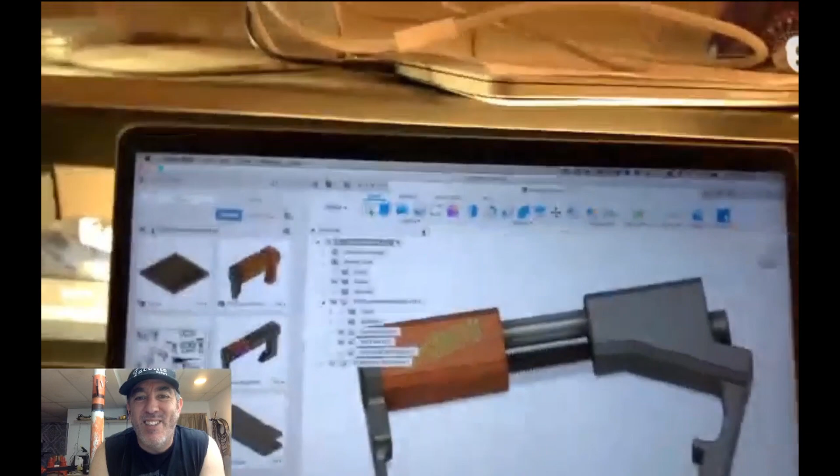So check this out. There's that quote from the other day that is hanging by my desk. That one will never come down. I know it was probably a moment in passing that nobody else thought was interesting, but when I heard it, it was the passion in Dan's voice. You asked him, how much do those cost? He's like, it doesn't matter. Just the way he said it, I was like, oh, that's so good.

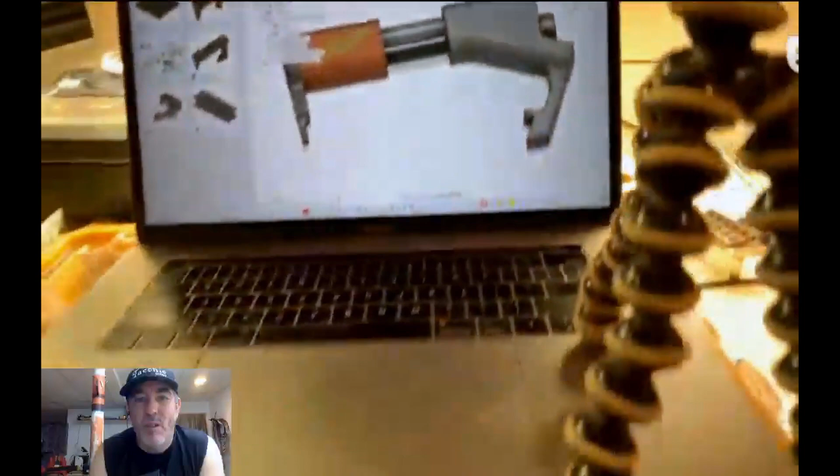It is so true. So I'm going to have to figure out a way to set this camera where I can actually use the keyboard. Do you have one of those little cheap tripod thingies? So I got this little mini Gorilla Pod. Hang on. That's cool. Oh yeah, so there we go. That's something you can see. So this is your trim setter, correct?

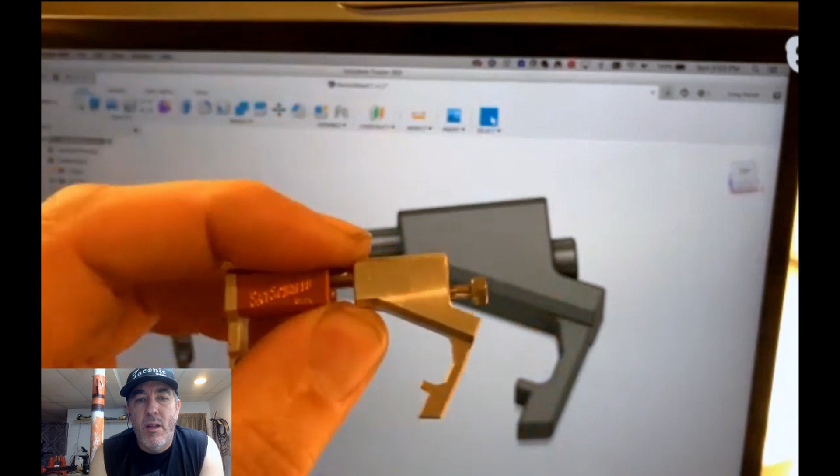Yeah. Hang on, let me grab the actual part. So there's the actual one, right? And this is manufactured by your friend in Indiana? No, this one I made this morning. This chunk is brand new. Hang on, I'm looking for the... here we go. Sorry, I'm flipping things around. This is the one that we sell now. This is just for Floyd Rose, normal original Floyd Rose intonation.

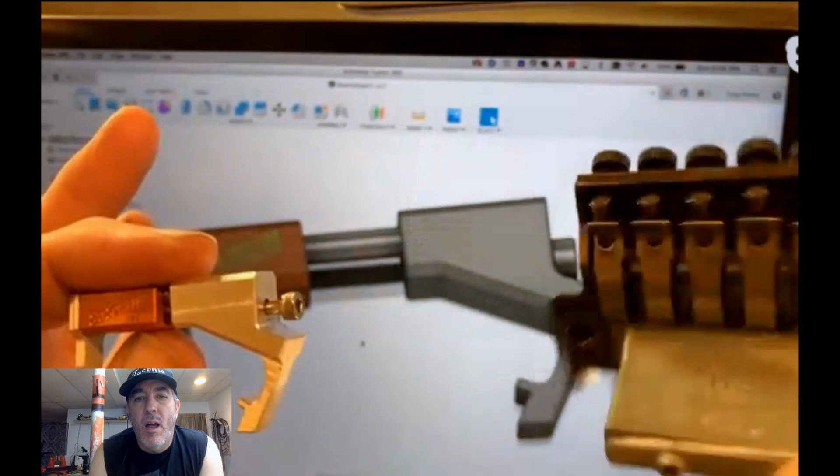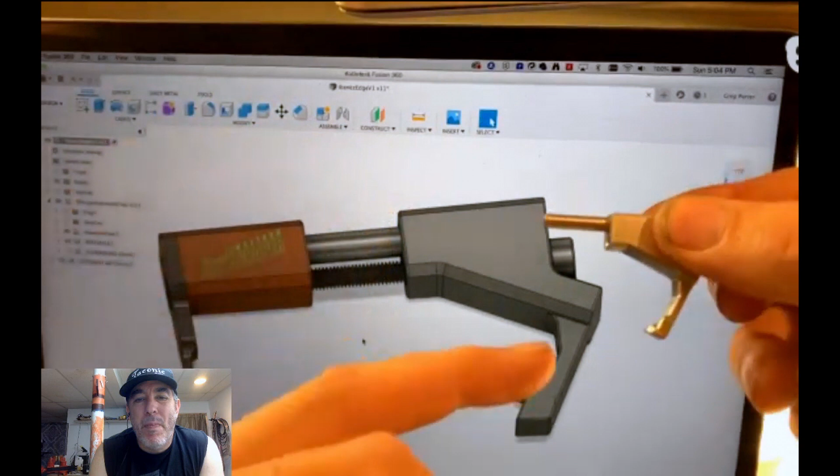And everybody has been asking me, can you do Ibanez? So I'm trying to figure out how to get a tool that works with them. I have a bunch of Ibanez tremolos sitting on my desk to make sure it works with everything. So yesterday I made prototype 1. I feel like I'm doing a puppet show. On prototype 1, the foot, the way Ibanez is, as you would tighten the tool, it would actually kick down. So this morning I redrew this foot.

I got up at 8 o'clock this morning, redrew the foot, and then recammed the whole thing. I make all the prototypes, so I recammed the whole thing and then spit this out. This was done before noon today. So in a matter of a couple hours, changing the design. From idea to prototype in an afternoon. Yeah, that's crazy.

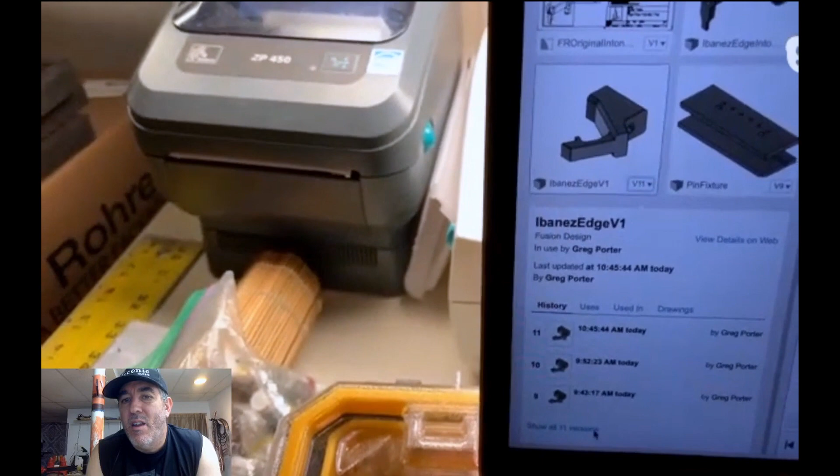Do you have the previous iteration? It would be good to showcase it. Is it still in the history in Fusion? Ooh, yeah. I don't do this very often, but can you see? Hang on. Sorry for the shaky cam. Here in the corner. To your right, just a little bit. There we go. It will take you through every version that you've done. I've done 11 versions of this tool, and at any time I can go back in and open that tool, and everything will come in with it.

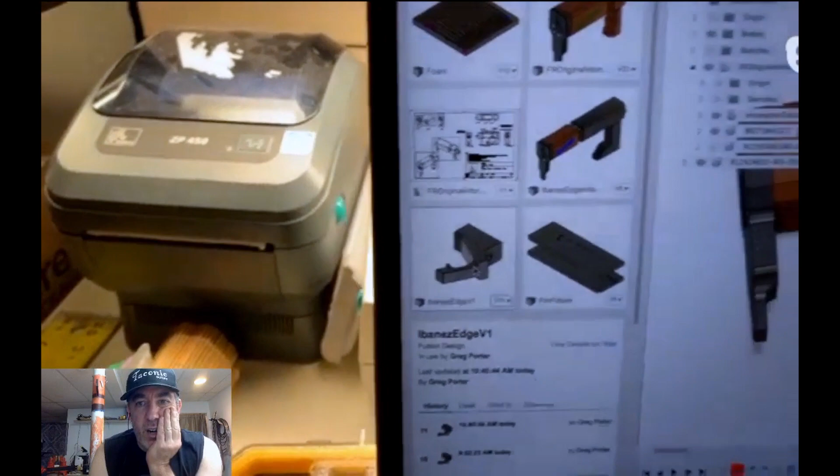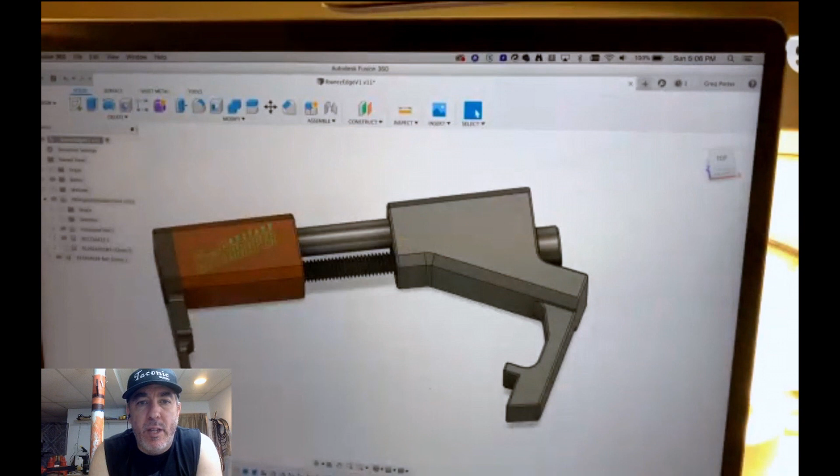Cool. So that's all server side too, not on your computer, correct? That's correct. So you don't have to have a terabyte of storage? No, it's free storage up to a certain amount. Sorry, shaky cam again. Then I think, like everybody, you have to pay. But I pay for a subscription, so I think I get bigger hard drive access, but I'm not going to swear to that. Can you rotate that just a little bit in the space there? Yeah.

Slick program, so you can really get around it. So this part is what's awesome: all of my fasteners, like this socket head cap screw, you can just go in and insert from McMaster-Carr. I don't know if you're familiar with them. Anything that McMaster-Carr sells, they have a 3D model for, and that just saves you all that time.

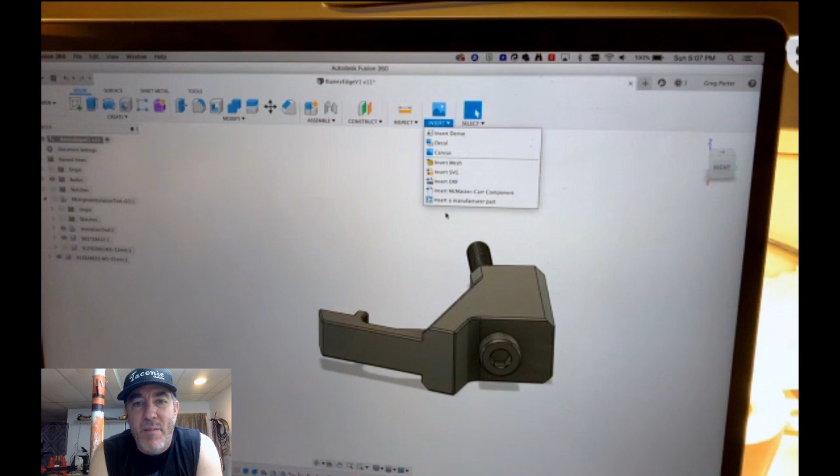Like these steel pins, I buy them by the hundreds, and I know when I go in and insert a model from McMaster-Carr, over here on this side it actually has the part number. So when I make this and say, yeah, that's the screw I want to use, there's the part number right there. I can just order 500 of them. Oh my gosh. That was a game changer for me.

So what's fun is there's actually a timeline, and you can see how this thing was built. You can literally go step by step. Give it a second to catch up. Can you actually go back to the sketch that you started with? Yeah, that's what I'm getting ready to do. So let's turn that on. So this was,

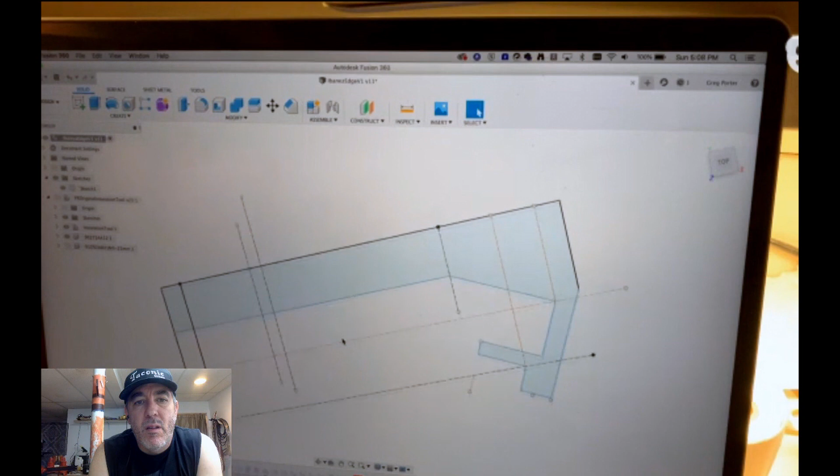I went in and measured with my calipers, which are up in my shop right now, to the thousandths, where all the clearances were, not in the tool, in the actual bridge. So just taking the calipers: where do I need to go. These are all the rough measurements of, hey, I need something that sticks down over here, I need a foot to catch something over here, and then I need this much vertical clearance.

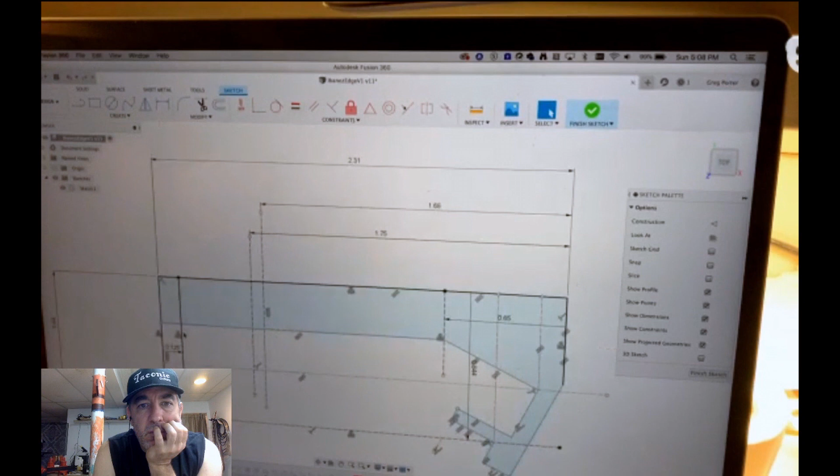If I go in and edit this sketch, you can see all the dimensions. One of these is a minimum dimension, 1.68 inches. I have to be able to pull it in that far. This is like a dummy where that hook would be that catches the saddle. Then this is where it needs to extend out to, and that's 2.31 inches. Then from this breakover point, I need 0.65 inches, and on and on. So this is all dimensioned up with how I think it should go together.

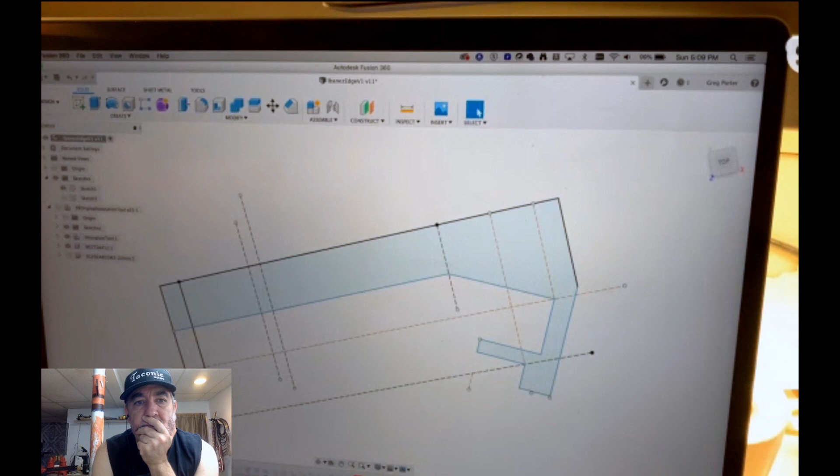Then let me hit that. I think it'll show how I brought these things in. I've got to turn things on as they go. Then I brought in that half of my tool. This is the back half, or the hook half, of the intonation tool I currently make. I wanted to use that so this can be both Floyd Rose and Ibanez with the same half, so you just swap out the hook end. So I brought in this model I already had made; we've been manufacturing those for a couple years. And it was like, okay, how do I interface that?

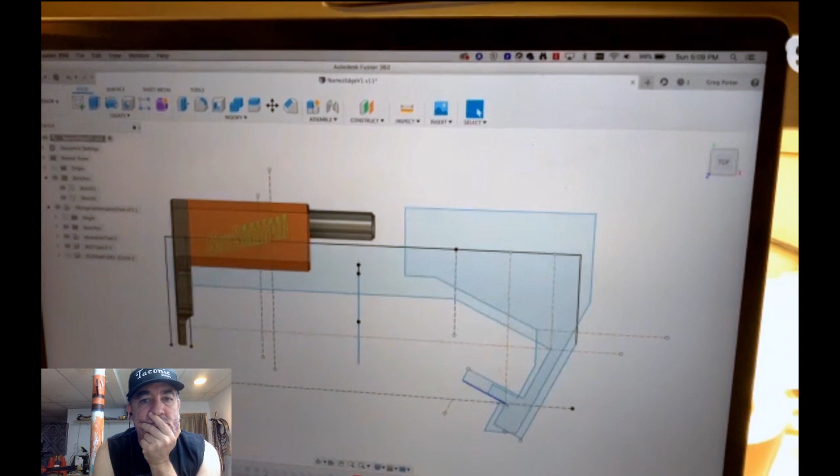I'll do it from the top here. This is stretched out to the maximum. Then here's maybe what the body of this thing is going to look like. So drawing the same lines, making things parallel and that sort of thing, but then capturing that detail from my sketches. The next step was to extrude it. I'll back up a step. I basically took this form and pulled it up, and I'll do this and just kind of undo it.

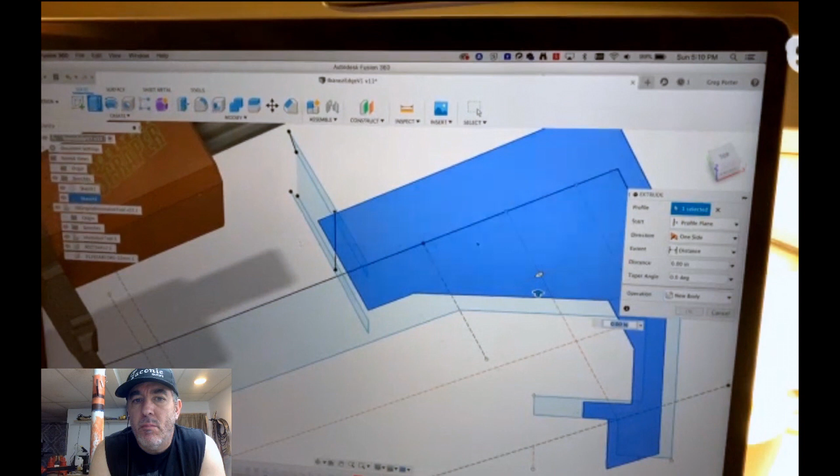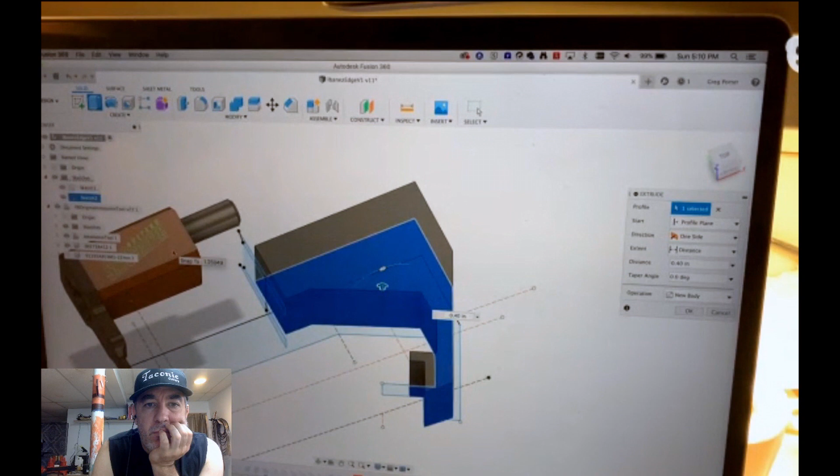So you just hit the extrude button. And your constraint is there to the left? You've got the geometry to the left telling it how far to extrude? Yeah. So let me try this again. I can stretch it and say, hey, I know this is 3/8 of an inch. Or you can start to snap to things, so that would align this. And then you can say, actually, I want it to be a 2-sided extrusion, and I'm going to grab this bottom side and make it that.

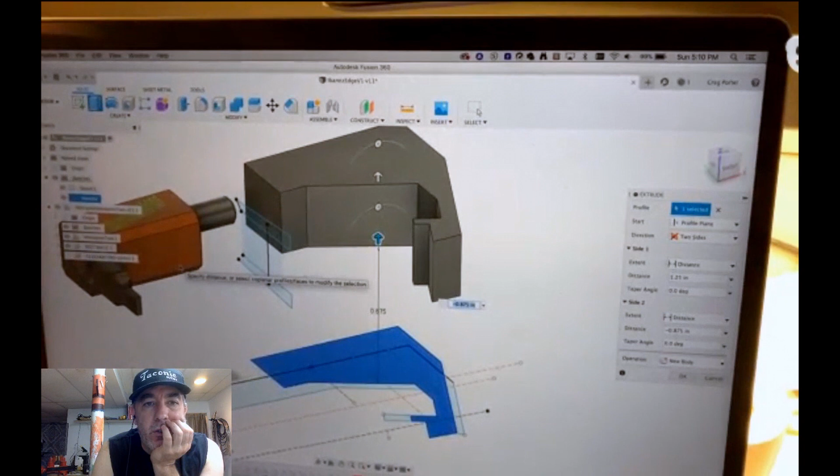So without knowing the measurements, I can make this thing exactly the same thickness as this thing. Did that make sense? Yeah, it's snapping to the geometry that you already have there, correct? Right. And I'll just kind of show a couple things. If I needed to move this face, like if that needed to match up over here, you can do what's called a press pull, and then you can say it needs to go to there. If for some reason I needed to start that way, I could do that.

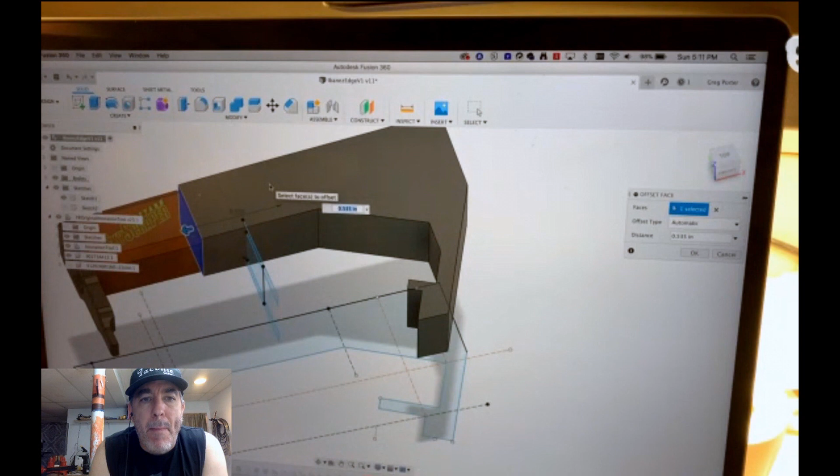But I'm going to cancel out of this and undo that so that we can take a look at this timeline. So I extrude the thing, right? And it's not exactly what I want yet, but it's close. Then kind of moving things around. Some of this might be boring. No, keep going. In this one, I created, let's see, I think it was sketch 3.

I created a sketch on this back face, okay? Because I wanted to take away a chunk here and a chunk down there. So I'll step back one, maybe. And I extruded using this sketch. I extruded into a void, and I'll show it happening. So there's that and that, right? So that makes the foot nice, how I want it. And then we can actually go backwards, and I can show you how that happened.

So you can create an extrusion. I can select this piece and this piece. And then as I pull it through, it's going to turn red because it's creating a void. So you can see how it cut that piece out. Yep. And I know this is iPhone through computer screen, whatever.

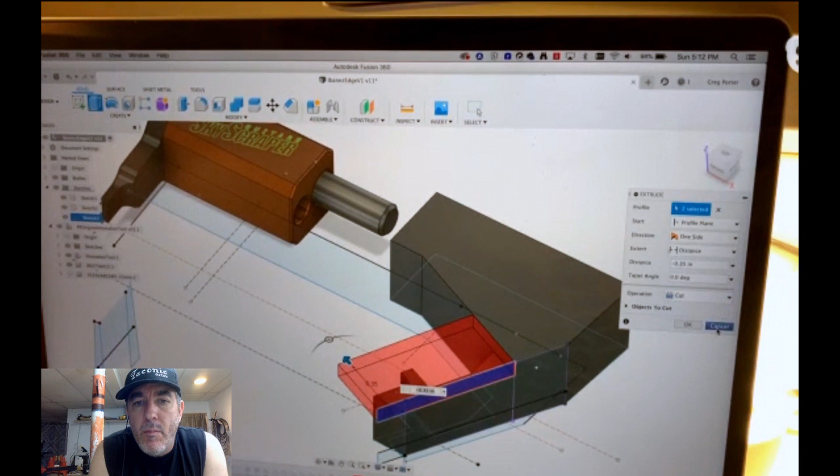You can tell it to cut. You can tell it to intersect. You can tell it to be a new body. You can tell it to join. However you want that to happen. Here we want it to be a cut, right? Because I'm taking material away. So that's the step I did to get that piece and that piece. Then the next is starting to chamfer it. So that's these edges.

So the chamfer, was that also part of a sketch, or is there a chamfer feature? There's a chamfer tool here, so I can just select any edge like this one, and you can just start to pull it, and it'll chamfer whatever dimension you want. Cool. Which is slick. And so part of this is utilitarian, right? What size does it need to be? How does it need to function? And then part of it is, how does this feel in the hand?

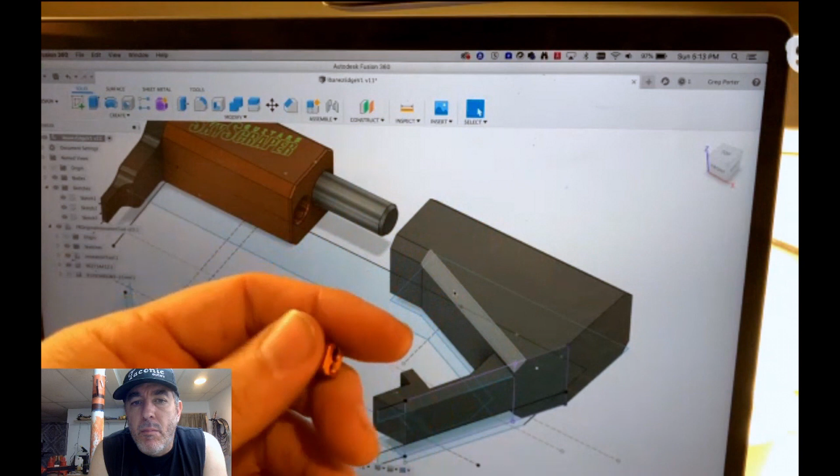And if you hold something with nice chamfered edges and you're working with tools all day, this is way nicer than something with square and sharp edges. Absolutely. So there's a little bit of that tactile that I'm always looking for when I design things. Like, yeah, that works, but how does it feel?

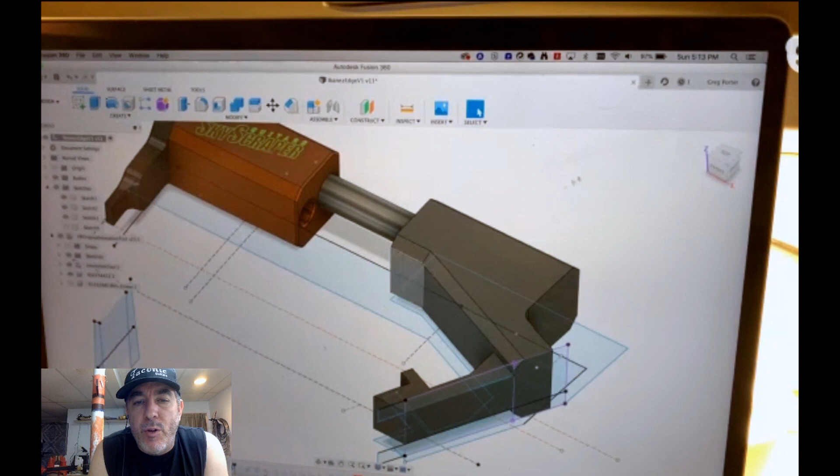Oh, like we talked before about Frank Ford's string winder. There's something about just that feel, like I was like, oh my god, I have a real job or something. Yeah, and I've got some tools in my shop I'll show you that are very much that way for me. I paid way too much for them, but they're so awesome, you have to have them.

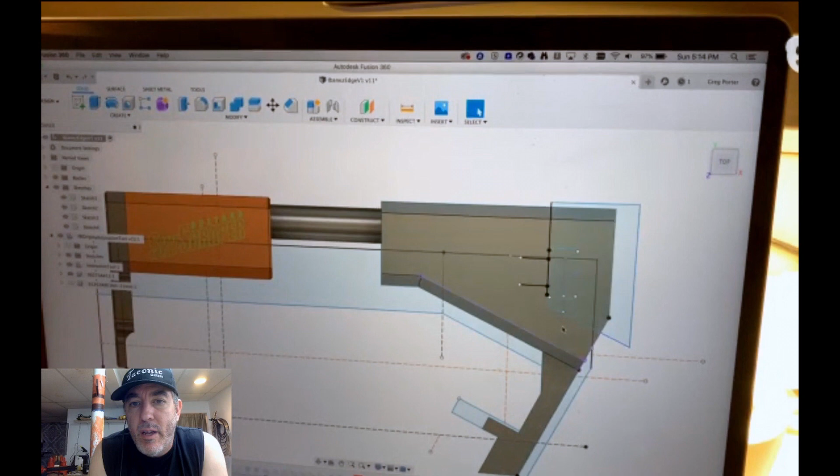So the name of the game in Fusion is making sketches on planes and pushing and pulling and extruding. It's so approachable. So this is exactly what you're talking about, Ian. So right here, I created this sketch, which is just 4 lines, one of them at an angle with a little bit of a radius there. So there's a tool called a Fillet tool, and you can just tell it whatever radius you want.

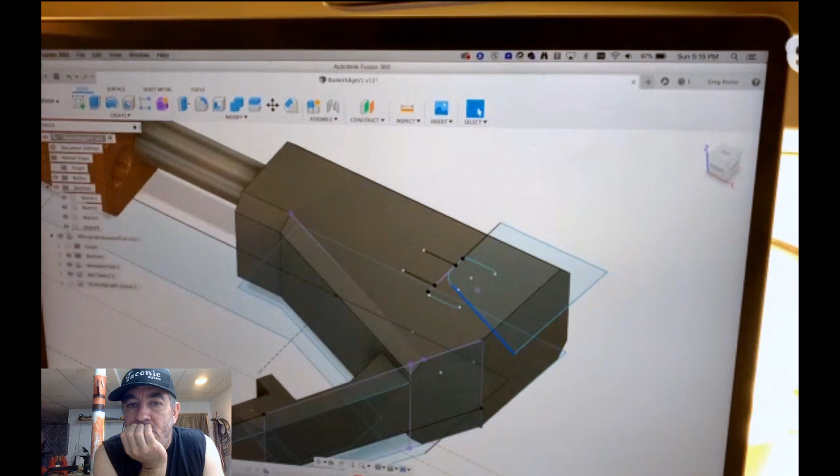I think you can actually, even if you're not in the sketch, nope, I'm wrong. Some things you can change in the 3-dimensional non-sketch environment, some things you can't. But if I wanted to edit this sketch, I just double-click it, and I could bring this line up and change the way this tool goes. I'll undo that, and I'll step to the next piece. That followed my sketch, right? So if I undo that, I'm going to just say undo again. Because this is a real working model, so I can't screw it up too bad.

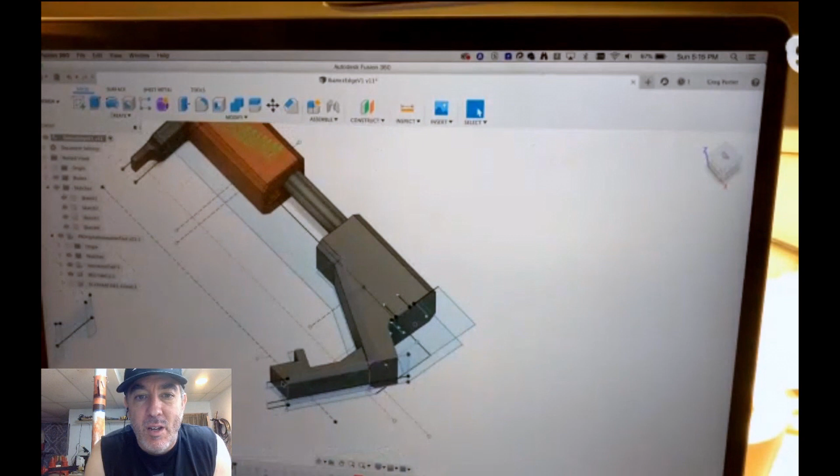Don't mess up your thing just to impress YouTube. I can always close it. I can always close it without saving. So everything starts to get messy when you have all your sketches on, but I do tons of little reference things that help me out somewhere along the lines.

So yeah, you can see we started with this really blocky 2-dimensional extrusion. We cut off a cheek, we chamfered it. I cut out this back thing so I wouldn't have to have a screw that was like 4 inches long, or I'm exaggerating there, but it took about a 1/4 inch off that screw. Long screws get wobbly, right? They do. So you want your screws to be short, and long screws are also more expensive too. So they are, and these are tiny.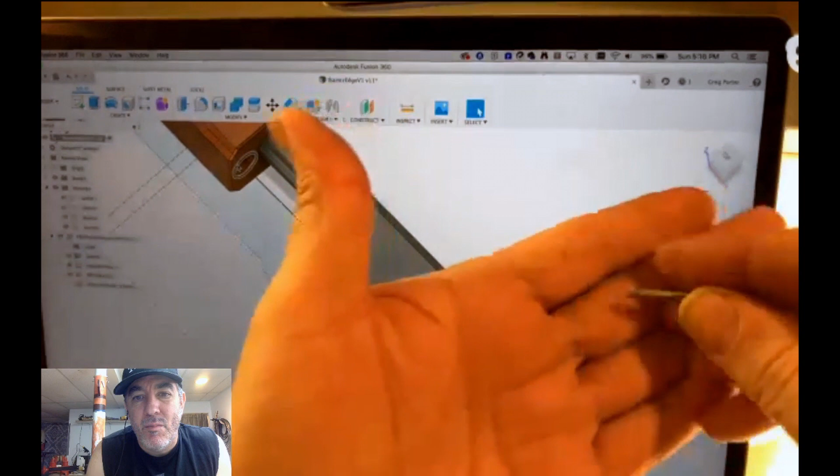This is like a, where's one of them at? Do I have one? My computer's sitting on top of my screw box. That's fine. But they're like tiny little screws. Oh, here's one. And tiny. And so making that a 1/4 inch longer makes it way worse. Yeah. So just trying to keep everything short and compact and all those kinds of things.

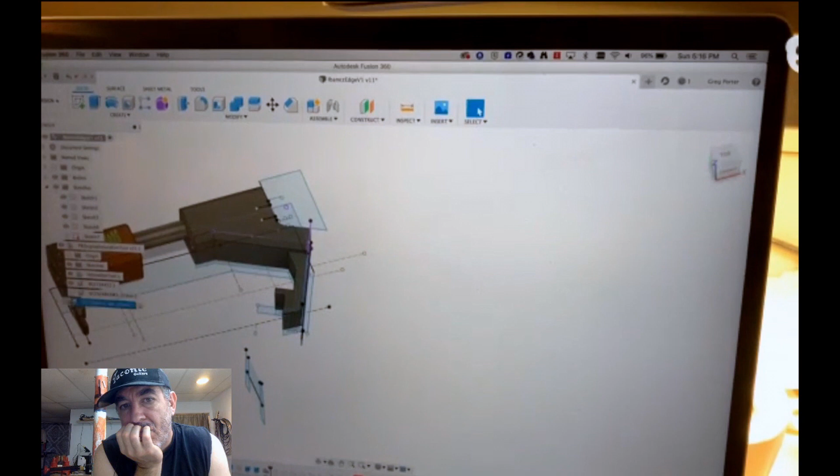But stepping through, I can't remember the order of things I did next. I'm importing screws here. That's what I'm doing. So you can see the screw come in from McMaster Carr. And then at some point, I'll flip it around. Maybe. Yeah, there we go. So now that was where I put the screw into place.

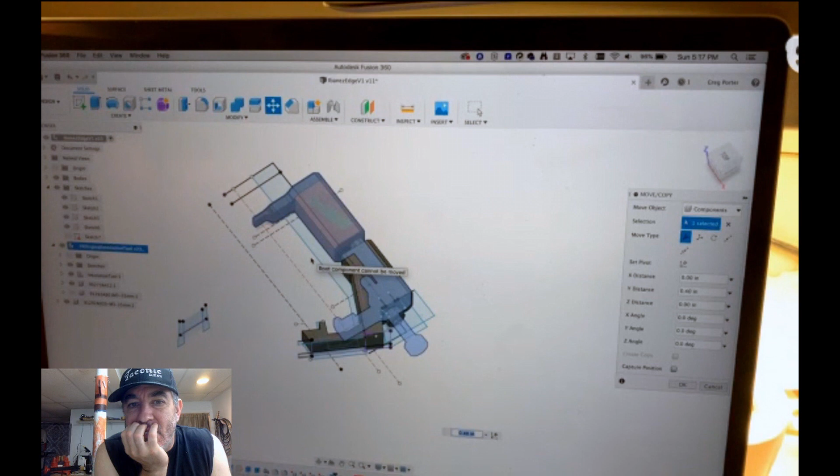And so this is so that I can grab that piece and move it and see, there he is. And see, when I collapse this tool, is the screw going to come out the other end? Is it too long? Okay. Now you can put together sliding joints and you can do all that kind of stuff. I just kind of get in and do it by hand, but hang on, I'm going to spin that. Basically, I knew I needed to get the hook to this line, right? So as I move it, just kind of looking for, okay, there's kind of the final resting place.

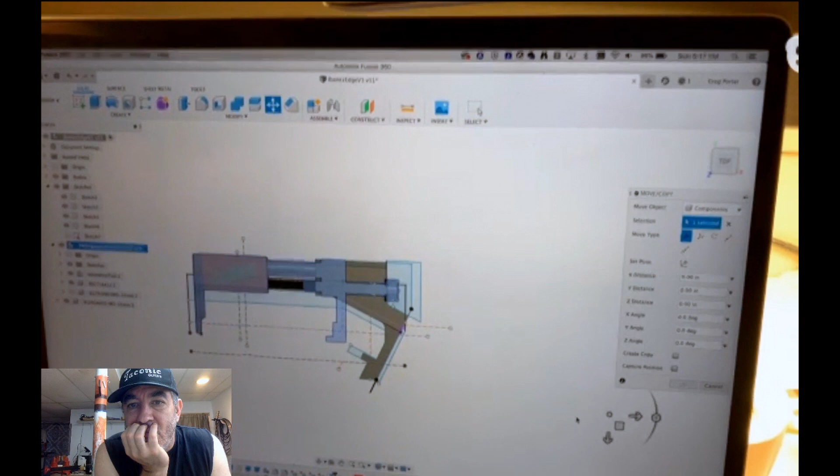Oh shoot, I just hit escape. Let me try it again. So this will be exciting. We may have to edit this out, Ian. But no. I'm all in.

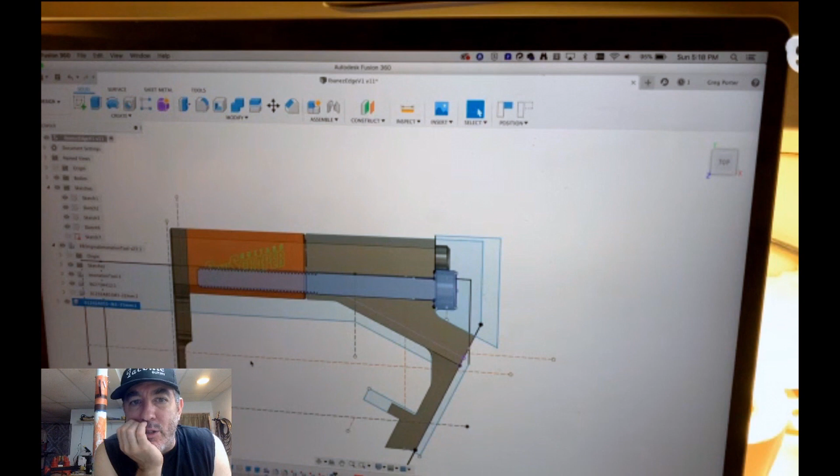There's the final resting place, right? Then I can go in and select this screw, and it's kind of like an X-ray, right? Like, oh yeah, I got a couple thousandths of clearance there at the end. I'm good. And sometimes it comes down to a thread or two: does this design work or does it not work? Absolutely. And who wants to be cutting the end of 10,000 screws off because you screwed it up? Yeah, and you can't. So if that happened, I would either add material here or take it away here. That's my sort of safety valve, right?

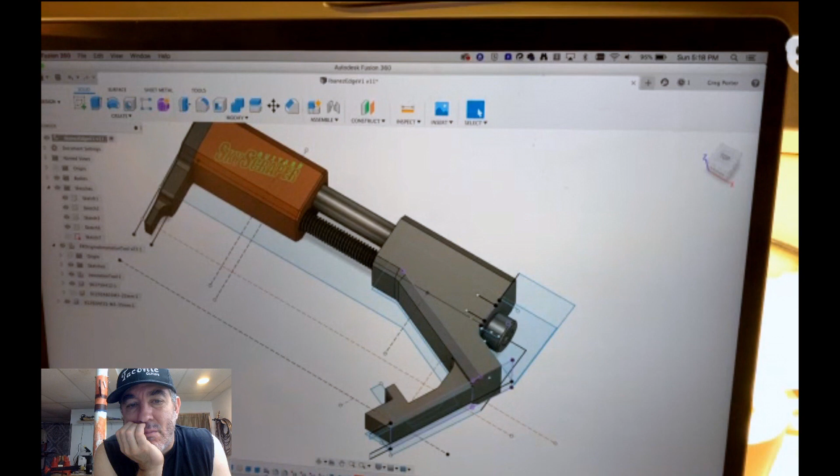So then as we go through, again, just the detail, the chamfers, and you'll see in one of these next ones, I start to add these little things. I need to turn the sketches off so we can see these tiny little chamfers here. Oh, wow. These are 7/1000 of an inch. Okay, so twice the size of a human hair. But if you don't do them, all of your edges are sharp, and when people grab your tool, it hurts. And you won't be able to see it. It'll just be a sharp edge, and it's not good.

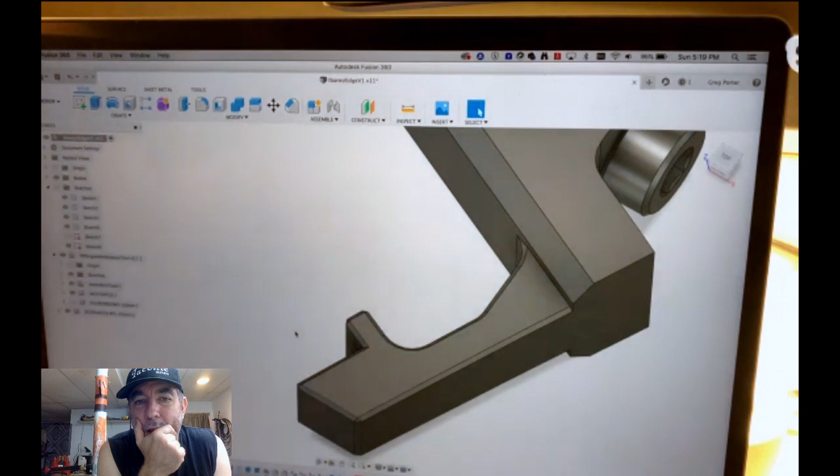So we go through and we break every single edge on everything that we do, unless we just can't get to it. So you'll see those chamfers, and then the last ones will be on this back edge there. So the whole tool, as you hold it, is not going to be sharp. And that's something I see a lot with people who water jet cut tools. The big one is these things. Hang on.

Sorry, I've got to reach across my notched straight edges. A lot of people just water jet cut them and they sell them, and they're cheap and they're nice. I mean, they work. We machine them, and every one of these has a micro bevel on it, because if you've ever picked up a notched straight edge and it's been sharp, it'll scratch your guitar in a heartbeat. And I don't know, I just can't have that.

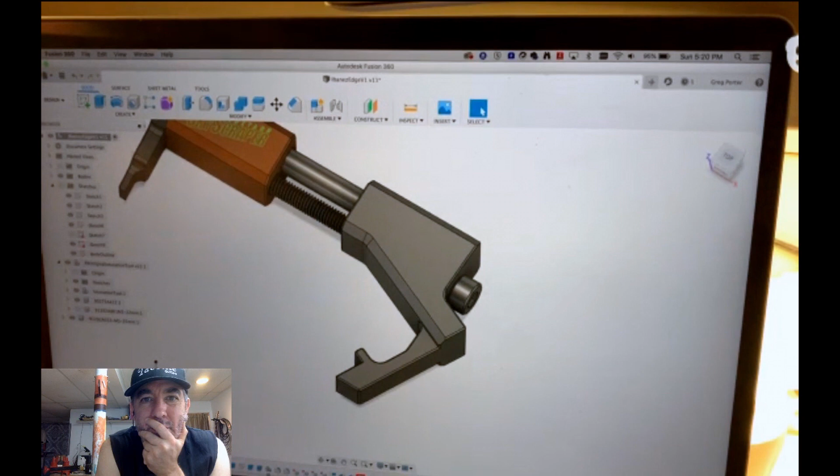And I'm not trying to brag or sell tools or anything. That's not my point. I'm just saying, when you're designing things, it takes care. You have to take care of things like that. Absolutely. Then on the machining side, I think this is the fascinating piece. So I'm going to turn off that part of the tool and the screw, because really we're just machining this. And the surfacing tool, by the way, is this one here. So you get into all these weird, cool tools.

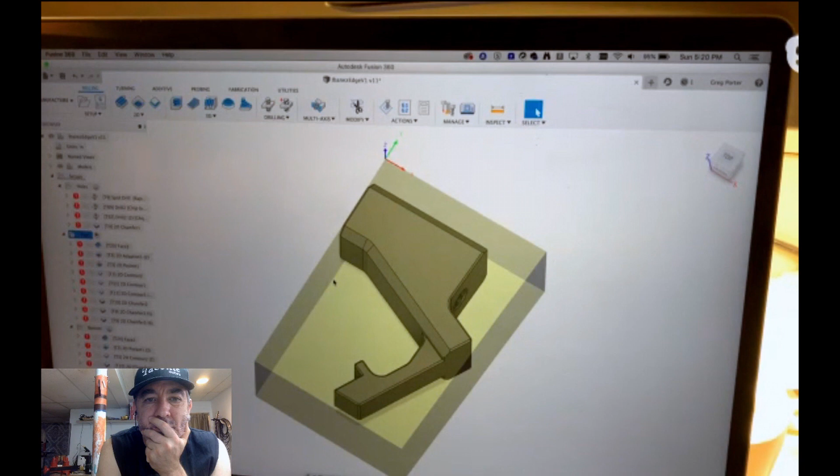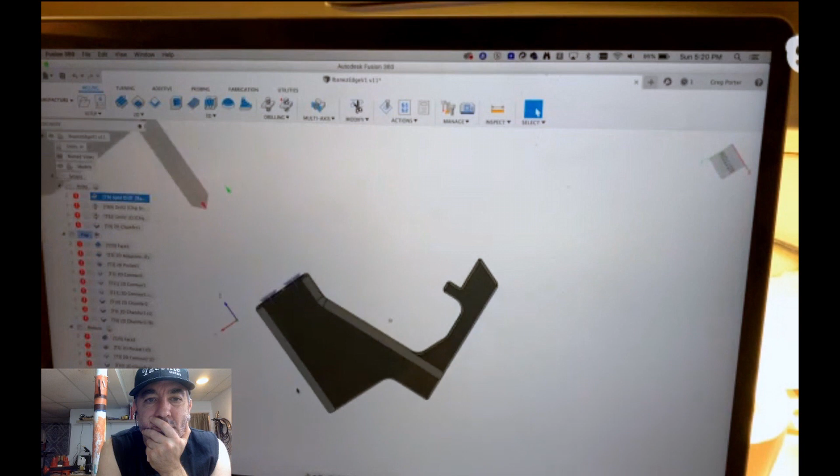That said, the manufacturing side is where the rubber hits the road for me. So this whole thing, this little tiny piece, takes 4 operations to make. So I have to set up and do the holes in this end, which has some beveling and some other things that we do. So essentially, the piece of material, if I can get this thing to cooperate, is set up in the vise, and I'll turn that on. So the block of material is set up in the vise like this.

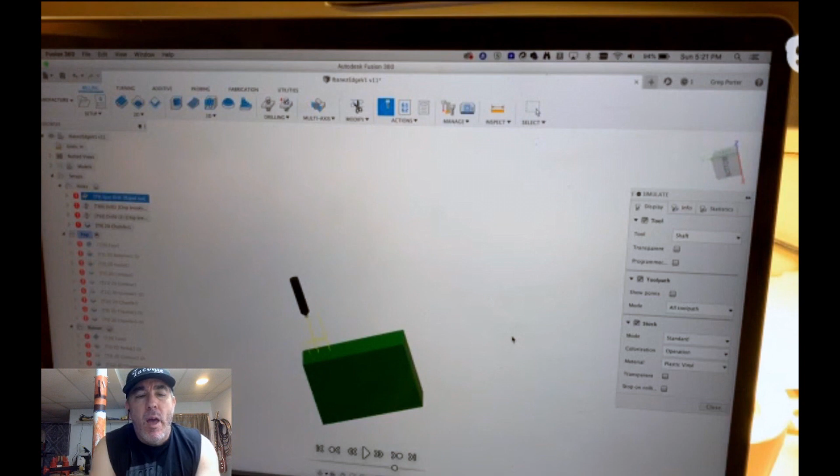And then the fun thing is Fusion will actually let you see how this thing's going to be made. And I have all of my tools programmed in. So I'm going to change this to just the shaft. I'm going to turn the stock on. I'm going to turn the model off. So you have a Tormach, correct? I do. And so is Fusion, like, are a lot of these measurements you go, I have this model Tormach, and Fusion goes, oh, okay, I know what you got, and then it does a little bit of the heavy lifting, or you got to do a lot of that manually?

You do all of the heavy lifting yourself. So I have a tool library, and these are my tools. And every one of these, if it's a drill, I go in and model what that's like. But then there's cutting data. This is all from me. How fast does it plunge? How fast does it move? What is this tool all about? And you sort of find these recipes as you go that work.

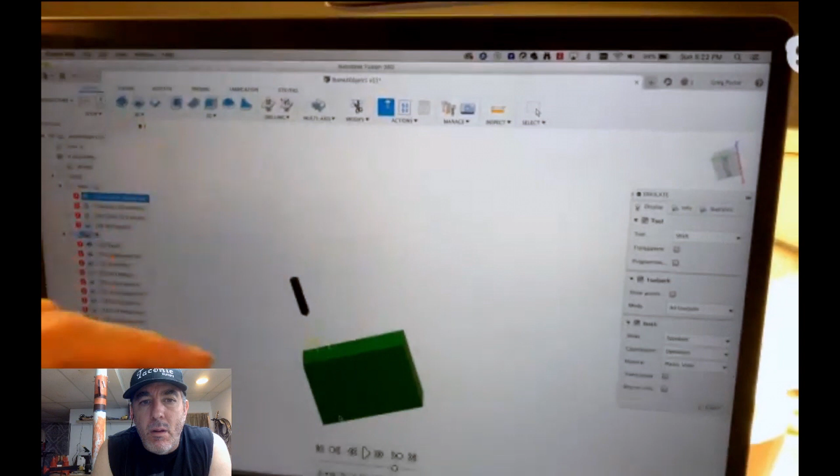Like this particular design, yesterday I broke a number 30 drill, which is, let's just call it a 1/8 of an inch drill, because this hole has to go almost all the way through this inch thick block. Well, when you're using those tiny little drills, drilling deep holes, it's really difficult to do without breaking tools. So I had to go in and reprogram the feeds and speeds on the number 30 drill to cut it like in half so that it could clear out chips and do all kinds of craziness.

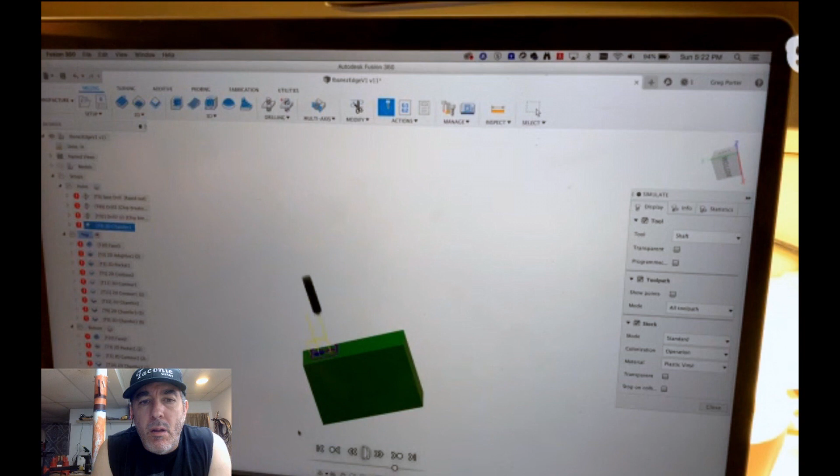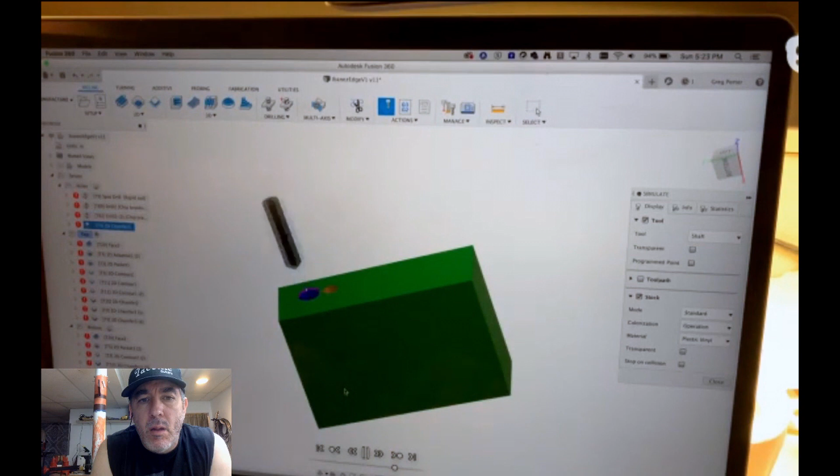But you can actually, I'm sure you've probably seen this, simulate what this thing's going to do. So that's my first operation. And then the fun thing is, I'll do this and we'll do it in fast motion. I can grab all the setups at once so we can watch how this entire tool gets made. So I'll do that. I'm going to turn these tool paths off because they'll get in the way. But you'll watch. So we're set up from the top.

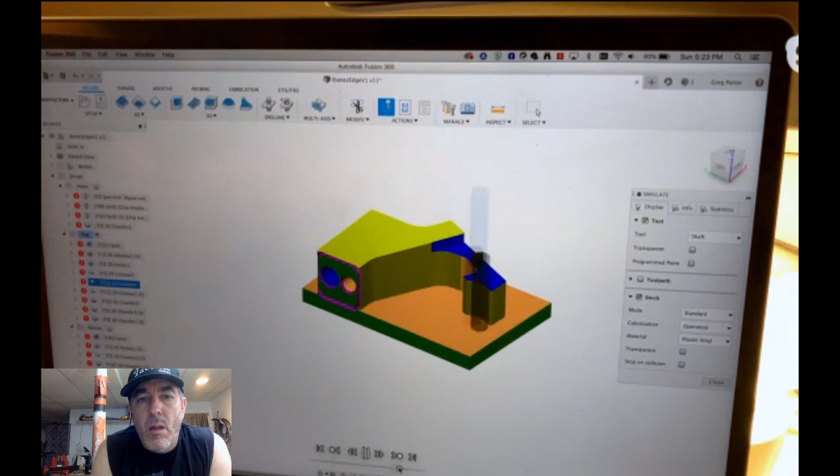This one, I have to set it up flat, and then it'll cut things out. I'm going to speed it up a little bit because this is going to be really boring. So it's going to take away that kind of material, and then it'll change tools here in a second and kind of clean things up from a smaller diameter perspective. There's it cutting that pocket. That's the cleanup. It's putting bevels on. And now it's going from the other side. So I'm going to hit pause and flip this over.

So in the machine, you would have flipped this, correct? Yeah. So I'll turn the tool off for a second. So in the machine, I flip it over and it has what we call a top hat on it. It's because you have a vise that your piece gets held in, and you can only cut down so far before the part just flies off. So you have to leave a little bit. And then I flip it over and put it back in the vise, and then it cleans off that top hat. How are you registering that so that it knows where it's at on the part? Okay, I'll show you that in just a second. Okay.

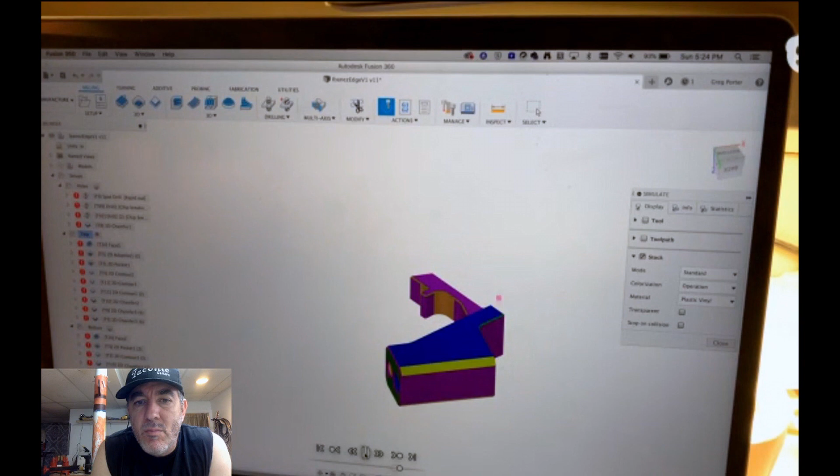I'll show you that in just a second. So here, and then at some point, we're done. So that's my whole tool. Every color represents a different tool path and a different cut and all those kinds of things.

You can see in this list over here to the side, that's how many tools and how many operations, I'm going to say it's 20 that the machine has to do. You have to tell it, hey, I want to do a spot drill with this size drill, I want to use an end mill to carve out this stuff, it's this big. Everybody thinks you just hit a button and the machine does it.

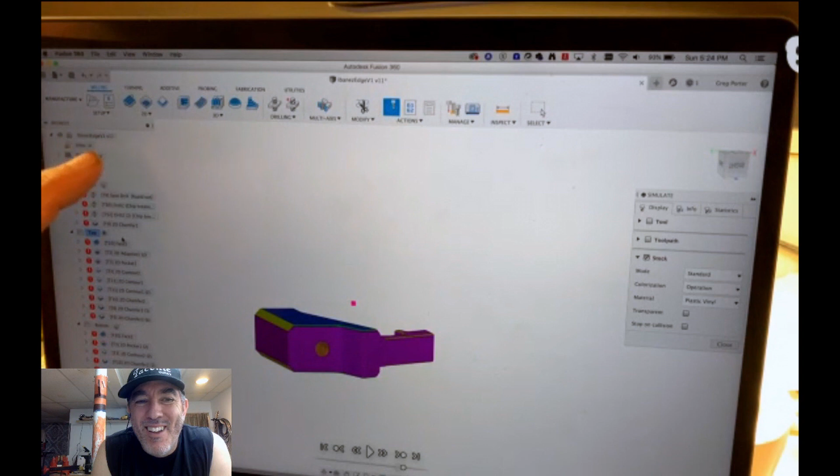The machine is dumb, it's really dumb. It knows how to move and put things where you want them, but it doesn't know anything. It also knows how to break your bits. You can snap off a few hundred dollars worth of tools in a weekend if you're not careful. So get into that.

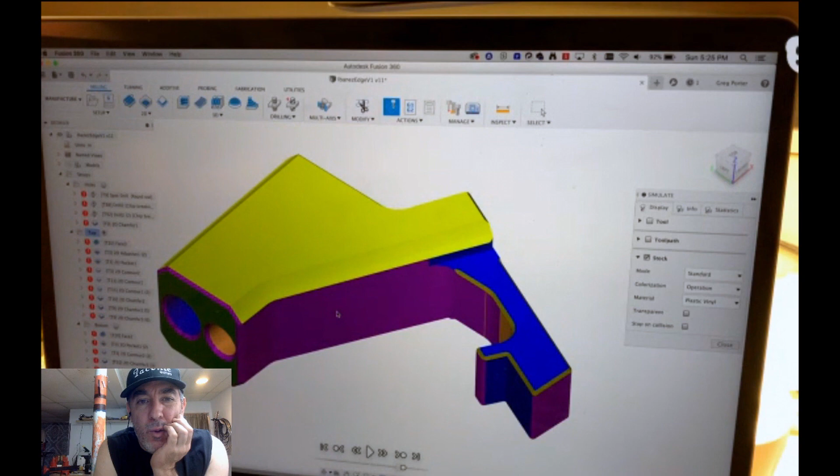Knowing how those tools work, I mean, that's something people go to school for. Do you have resources for what do I do with this cutter kind of stuff? Or did you just go online and read everything you could, and that was good enough, and you were willing to break a few tools to figure out what was going on?

I think anybody who makes anything has the same attitude. Like, I don't care what it takes, I'm going to make this thing, right? You have to have that no fear, damn the torpedoes attitude.

I got a lot of fear. Well, now there's healthy fear and there's unhealthy fear, right? Healthy fear is I have a 1918 whatever, fill in the blank in front of me, a fiddle or a guitar or Martin Brothers, whatever. Yeah, you don't want to screw that up.

That's healthy fear. I've got a blank chunk of aluminum that is nothing right now. There should be no fear, right? You're starting out with something useless and you're trying to make something useful, so you can't screw that up. If you wind up with something useless, it's a no-sum game, right? Nothing ventured, nothing gained.

You're cool, you didn't cost somebody a million dollars or their prized possession. You don't have to explain to anybody why there's a chunk of aluminum in the trash. I'll have to explain to myself. It hurts, something deep within me hurts. It hurts to fail. I try to get over it because it's a really unhealthy habit. But I don't know if it was beat into me when I was a kid.

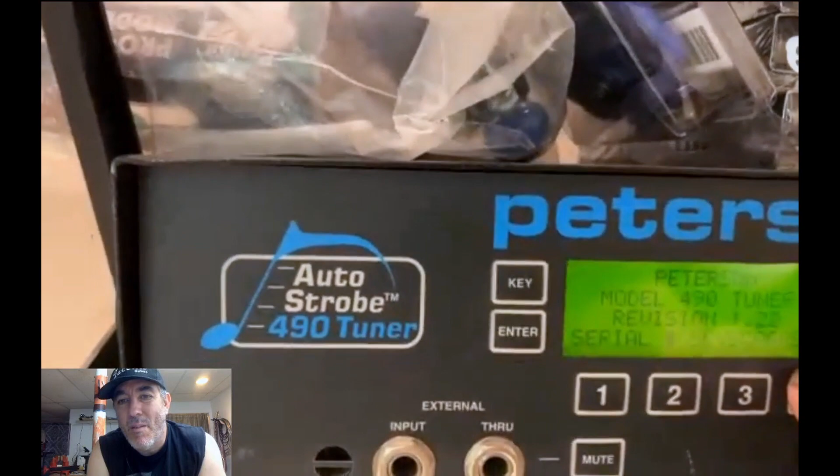So flip this around, you've seen one of these before, right? So we're gonna watch this as it comes up - my serial number. I just got this back from Peterson, it had to be repaired, and it lost its serial number in the data, so they put in a custom serial number. It'll say Skyscraper as my serial number. I don't know if you caught that when it came up. Hold on here.

Down in the corner, Skyscraper is my serial number on my Peterson. I think I'm the only one who has that.

It's hard, I don't even think they're making those strobes anymore, are they? I don't know. This one had all the old electronics in it, I can't remember what year it is. It's old, and when I sent it in she said, 'Do you want the updated something or other?' I don't know if it was a different color screen, there's something different about this one from when I sent it off. I don't care, I just want it to work because that's been my guy for years.

I've got this one as well and this works well, but I like the old Peterson. I like to hear it hum in the background, it makes me comfortable.

So yeah, I'm gonna walk upstairs. Whoops, I slipped on some things. Oh, I was gonna show you this, this is on the side of engineering and manufacturing as well.

So these little parts get a pin pressed into them, and we have a jig for pin pressing. All of these little parts fit into these little teeth back here, and then you crank the vise. I've got different jaws that do different things, but that's one thing we make on the machine.

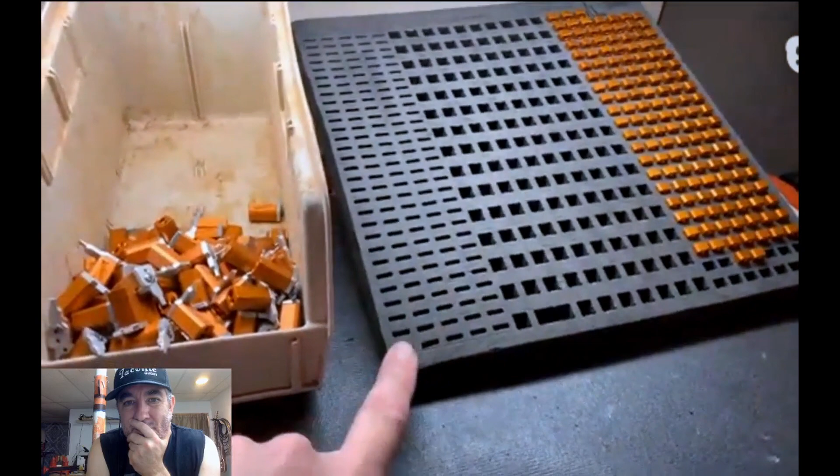And then these little foam things, I do in Fusion as well. When I send parts to the anodizer, I send them 150 at a time, and they're all in these little spots. When I used to get them, we didn't do them this way, they were just in a box, and they'd be missing like 5 or 6 parts of each one because they would just drop off into the tank.

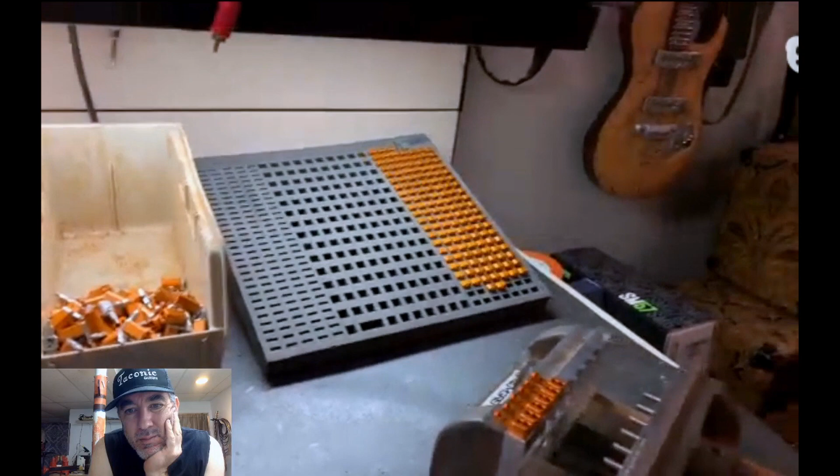They get banged around, and we had them use paper towels and all kinds of stuff to stack things up. But anyway, I came up with that, I'm like, this makes them accountable, right? If it shows up and it has all the slots filled, it needs to leave with all the slots filled. So that just made seeing your presser there, it made me miss manufacturing.

I really enjoyed my time in a guitar factory, coming up with all those little solutions. It's kind of funny, like I said I have a job as an architect, and I come home and work out in the shop all the time. People are always like, don't you just want to go home and put your feet up? I'm like, no, this is interesting stuff, and I love this stuff.

This is my Tormach, so you can see I work in a garage. We park in here, and my car's on a lift so we can get this car in here during the winter, because I live in Colorado where it's cold a lot for a long period of time.

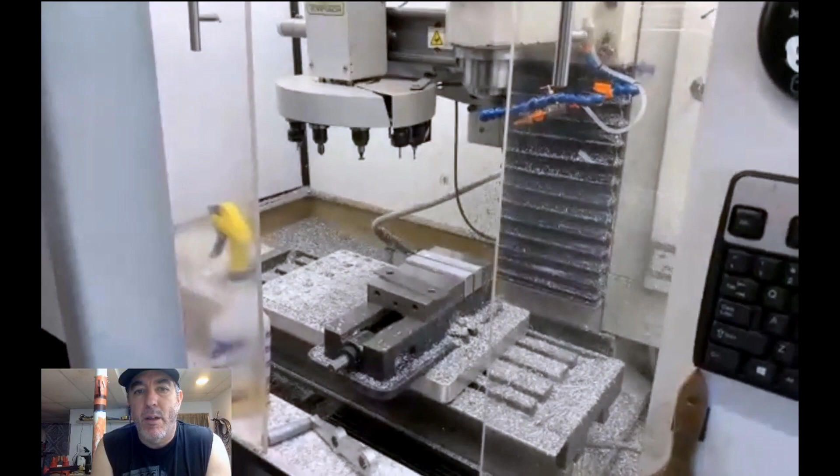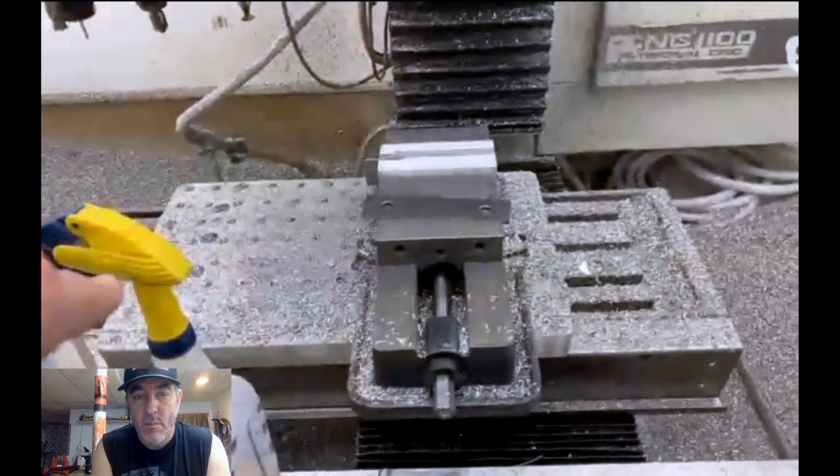So this is an 1100 series, I can't remember exactly, I want to say I can do like 18 inches this way, 8 or 9 inches that way, and maybe a dozen inches this way. And then I've got a tool changer in here that holds about 10 tools, and I would fire everything up, but I've got my air compressor off right now.

It takes a while to pump up, but there's a vise on here now, and this is a mess because I just used it this morning and haven't cleaned everything up. I've got a vise on here so I can take small parts, like if I have a blank like this, I can put it in the vise, flip it, and do all kinds of things with it.

Or I can take this vise off, and I've got what they call a breadboard. So some of these holes are pins and some of them are threaded. So I can actually bolt stuff right down to the machine and work on it flat if it's too big to fit in the vise. I don't do a whole lot of that because I just make onesies and twosies.

My machinist will bolt a plate of aluminum down to his machine, and it'll just sit there and cut parts for 8 hours because it'll cut 150 parts out of one plate. So I don't do that, though. I just make one at a time. Kind of torturous. But like this, let's see.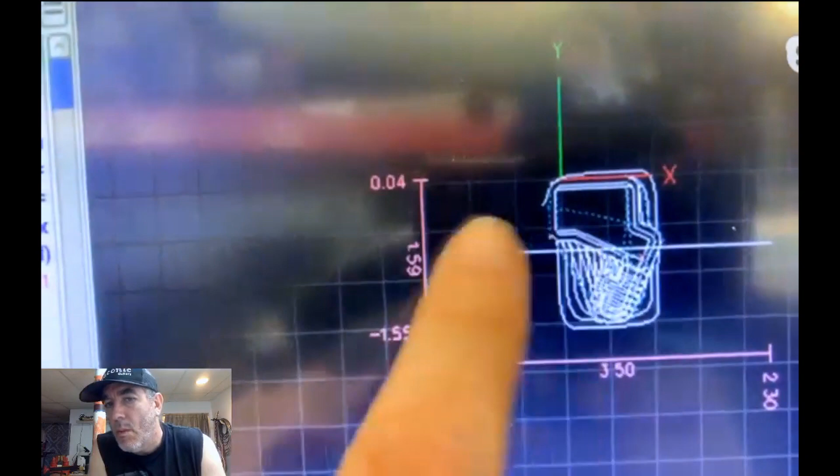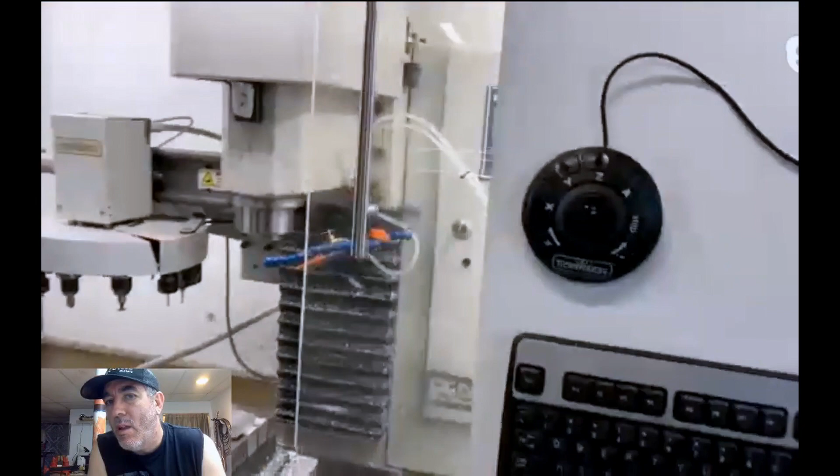So this was the machine program for the parts that I was making this morning. There were 4 files for the Ibanez tool. You can just hit this and load it, and it'll show you the outline of that tool. Sorry, I know it's kind of glary. Oh, that's touchscreen? It is. Yeah, it's pretty slick. So I'm able to just pop the code in here, and you can see, for that program, how many lines of code there are to make that one part.

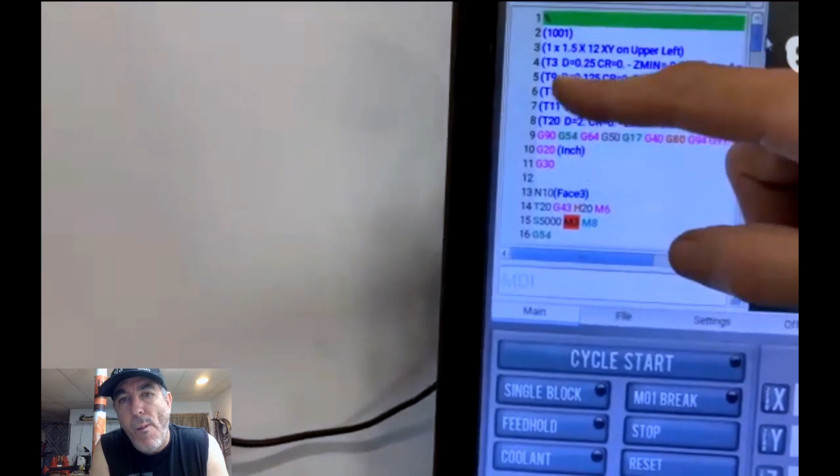Pretty in depth. And so that's what they call G code, correct? Yeah, that's exactly what it is. It's G code. That's all the numbers that go into the computer for the X, Y, and Z axis for the machine and tool speeds and whatnot. Up at the top, it tells you all the tools you're going to use for the project. Tool 3 is a 1/4 inch flat end mill. Tool 9 is my engraving tool. T10 is a bigger 1/4 inch chamfering bit. And then it goes on. It'll say to the side what all the different tools are.

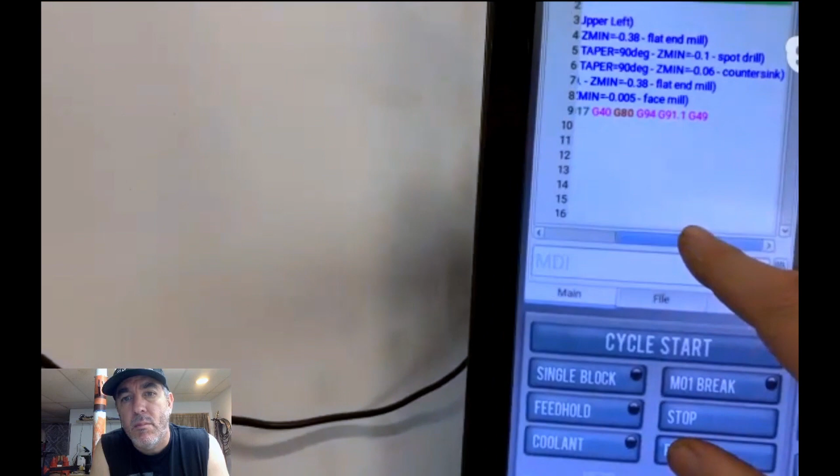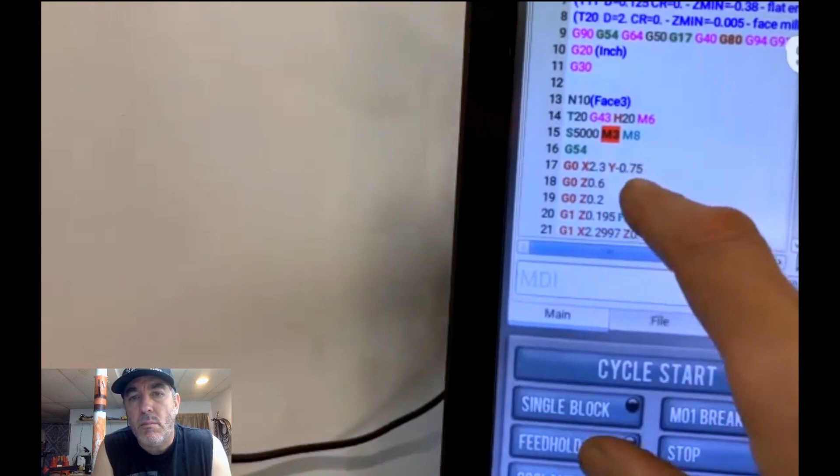And then it goes down. The nice thing about Fusion is it tells you what the operation was called in Fusion. So Face 3 was what I called one of the operations. It's using tool number 20. It's going to go to the tool changing place and use my automatic tool changer. Then it's going to go to X and Y, those coordinates, and then start to move in the Z, and on and on. You can read through it and figure out how to make all this stuff.

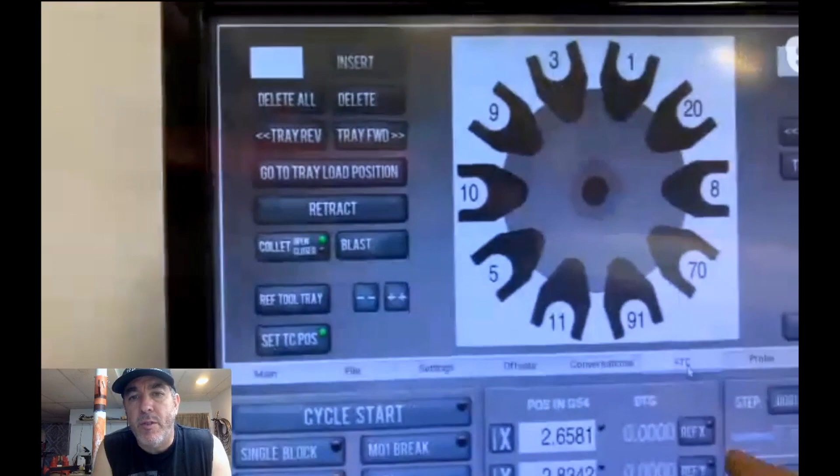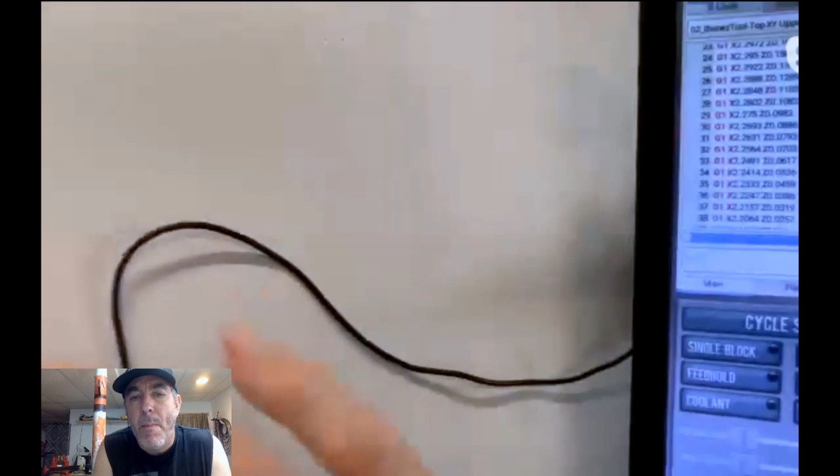But is that helpful for troubleshooting? Like if you hit emergency stop and look in the code, can you tell exactly where it's deviating from what you had planned? Yeah, so anytime the machine is actually running, which I can do without the air compressor. Sorry for the shaky cam again. There we go, we just fired it up. It's going to want me to reset everything. So as the machine's moving, you can see the digital readout here, which tells you exactly where the machine's at in 3-dimensional space. I'm moving the Z-axis there.

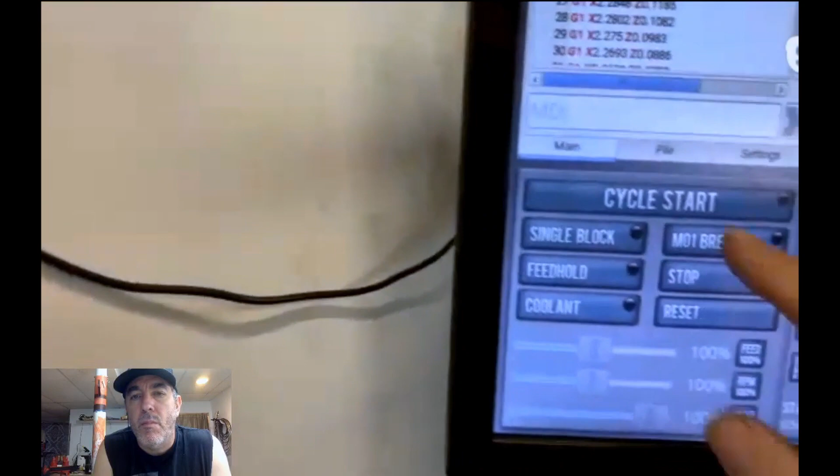And there's no tool in there, so I could actually just hit cycle start, right? Only when it's referenced. Hang on 1 second. It's got to reference some things, and then it'll be able to do some magical stuff.

This may be boring for some people. Well, I guarantee you my wife is not going to watch this. Come on, buddy. You can do it.

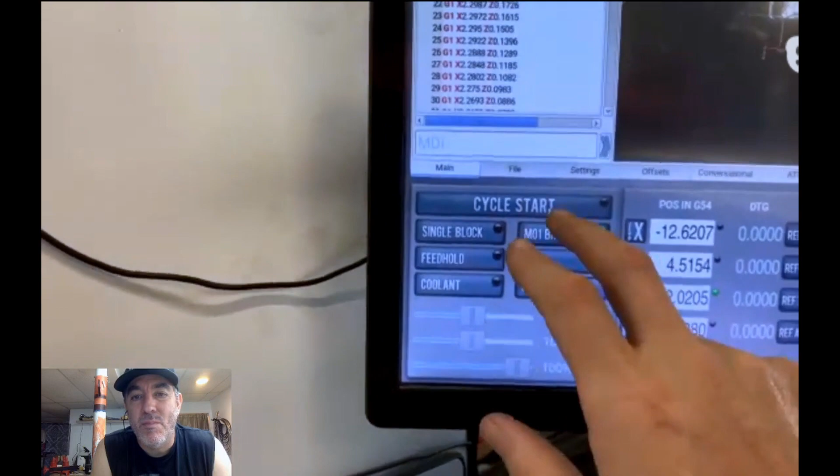There it goes. So I can hit cycle start. Now it's going to start moving. Oh, shit, I got to stop it. Sorry. It was going to put a tool in there without air, and it can't do that. It would just break a tool.

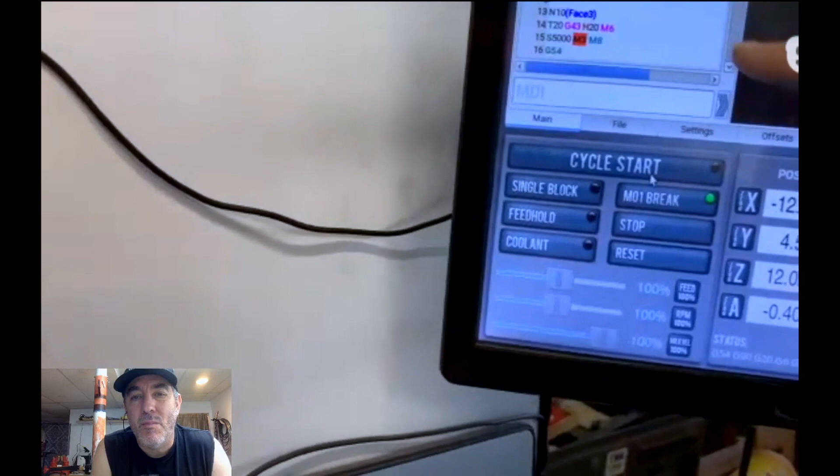Anyway, as that thing starts moving around, it'll read out here, and as it goes through the code, I can look and see it's at Z0.0983. And if I think it should be at Z0 or Z1 or something else, I'll be able to say, oh, that's why that tool is going to break if I keep doing that.

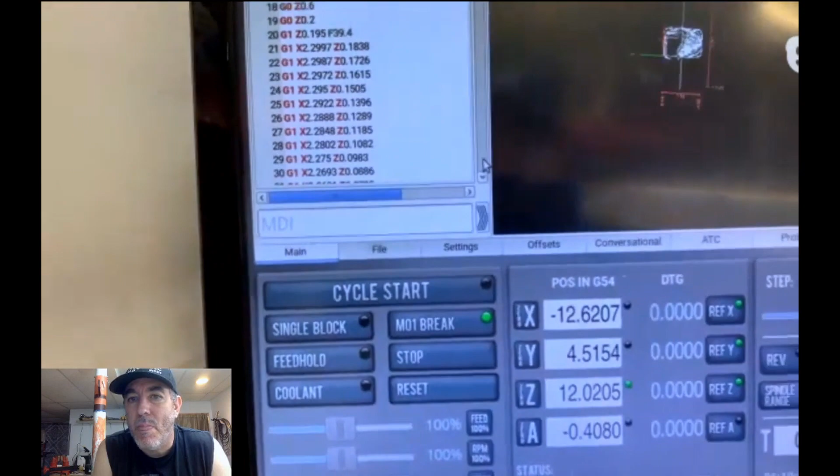But yeah, you can absolutely freeze it and then start it back up or do whatever you want and sort of do the detective work of where it screwed up, which is always fun. So when you're running a new toolpath, you're hovering over that thing watching, right? Like you're all hands on deck when you're demoing a new toolpath.

That's my life. Yeah, since I'm doing the prototypes, right? So I make one and then I never make another one. And yeah, so when this thing is running, I am just eyeballs on it, making sure, and hand on the escape button, just ready to cancel out. Because tools for these things can get really expensive. You might have a $100 tool, and if you snap that tool, that's a crisp Benjamin right there, man. I mean, you just spin it.

And it is. I threw one away this morning. I didn't throw an expensive tool away. It was like a $15 tool, but it still makes you mad. Yeah. It's like, oh, why did I do that? And you go back and you look at Fusion and you go, yep, that's where I screwed up. And you move on. But I always try to keep it in perspective. We're going to make hopefully thousands of whatever it is that I'm prototyping. And so screwing up a tool or two on the initial run, it's not terrible. I don't enjoy doing it, but it's not terrible.

Well, I mean, what would you pay for prototyping though? I mean, sending CADs off and then yeah. And so this machine, I'm not afraid to talk numbers because I think it's helpful if somebody's thinking they want to get into something like this. I bought this machine used. This is a 2012 machine, and I bought it 2 years ago, something like that. So it was old when I bought it, and it was $10,000 for me to buy it. That's so reasonable. It's completely reasonable, and $10,000 is a lot of money. Like you could buy a car easily for $10,000, a cool car. Yeah, but now you can prototype a car.

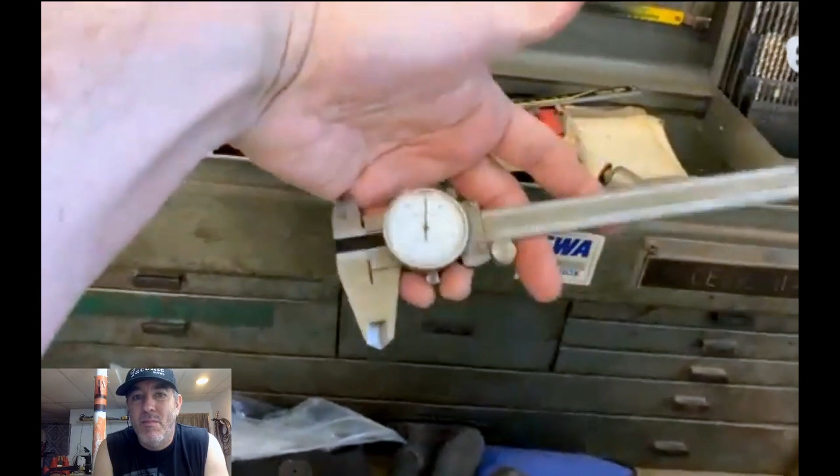Yeah. And I don't know how to say it any other way, but these are his go-to calipers. These are my go-to calipers now. And it's like, well, if these worked for him to build airplanes, they're going to work for me to do my little tools here in the shop. So absolutely. Yeah. I've got a few things from my grandfather too, and they're very special to me.

Speaking of the Rikon bandsaw, I had the opportunity to use one in one of the shops I worked at. They had just the little 9-inch Rikon, and it was super usable. It was really good. All of the 9-inch bandsaws are real throwaway kind of garbage stuff, like the Ryobis or whatever. But that Rikon, somebody took the time to make a decent 9-inch bandsaw. Really said a lot to me.

I've seen a lot of those on people's benches. I think if I remember right, the 9-inch is the one that'll actually fit on a bench, right? It doesn't have a stand. Yeah, it's a benchtop. Yeah. No, they make a really nice bandsaw.

I spent a fortune on that thing. I feel like it was like $2,000, maybe. For a bandsaw, that just feels really spendy for me. Did you say 18 inch or 19? I think it's 19. But I wanted to be able to cut guitar tops on it in one shot, yeah.

And that's what you got to do. In the back corner with my weed whacker on it, I've got like a 16-inch planer and a jointer and some other things.

So I worked in big rock and roll for a few years, right around the year 2000, doing big shows. So more stage managing. We had an audio and video company. We did lighting too, and we had a stage as well. But we did big radio shows and things like that all around the country. Everything's got to be on wheels. So yeah, everything in here is on wheels, so I can put it where my wife parks when she moves her car out. I can work on it there.